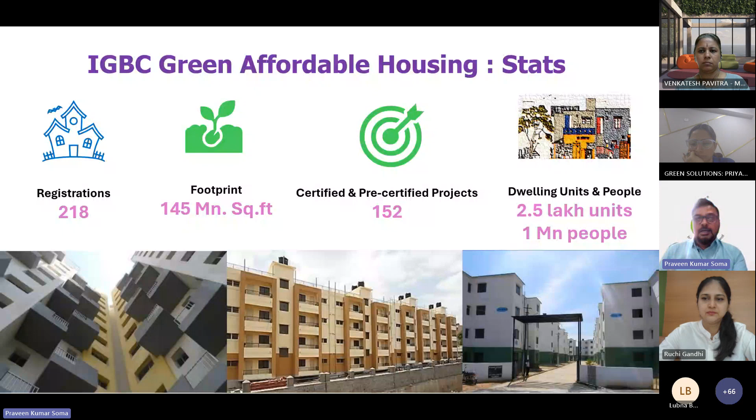If you take the overall residential segment, we have close to 2.5 lakh units going green in India. In the affordable segment alone, close to 1 million people are staying in green affordable housing today, as I'm speaking.

When you see the gap, as per the Ministry of Housing, India needs an additional 25 million affordable housing units by 2030. That means in the next 6 years we should have at least close to 24 to 25 million affordable housing units built.

That means each year we should construct an average of maybe 3 to 4 million units in India. That is the gap we still have in India to meet population requirements and the housing requirements of the poor and other areas.

When you look at affordable housing, this rating system holds good for metros with area less than 60 square meters. For non-metros, this is relaxed to 90 square meters.

Since the Government of India and Pradhan Mantri Awas Yojana have come out with separate exclusive guidelines for affordable housing, even if the area is higher, if the site plan is approved, that can still qualify under green affordable housing. That means the site should be qualified for green affordable housing construction.

So this scope also needs to be clear for participants, because many CREDAI and NAREDCO developers are still unclear about which classification they should use to certify green affordable housing ratings.

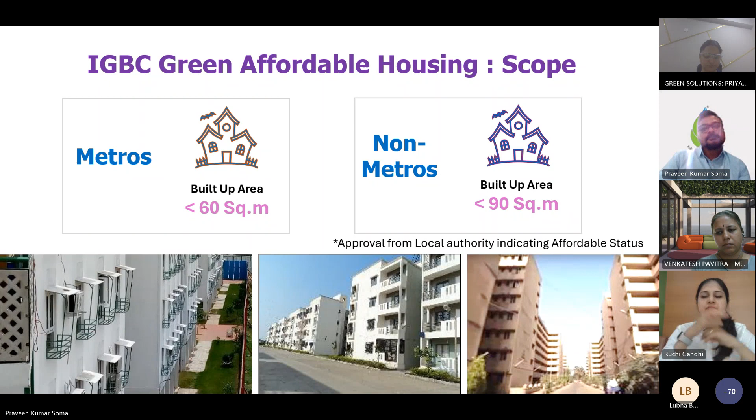If you look at the incentives, these have been in place since 2011, when the Ministry of Housing and Ministry of Environment and Forest gave relaxation for MoEF clearance for all pre-certified projects in 2011. Then all state governments extended free FAR.

For example, the Government of Punjab and Government of Rajasthan gave clear FAR incentives starting from 5% to as high as 15%. Similarly, West Bengal, Government of Haryana, Government of Jharkhand, Government of Uttar Pradesh, and Government of Andhra Pradesh have done the same—Andhra Pradesh specifically waives the premium for registrations.

Similarly, we've seen Government of Maharashtra and Government of Gujarat giving incentives, excluding Mumbai in the case of Maharashtra. Tamil Nadu gives incentives for reimbursement of fees. Government of Kerala and Government of Himachal Pradesh have also given incentives for green residential projects in India, which has raised the bar.

Today IGBC is over 12.5 billion square feet, as I'm speaking, with close to 11,500 projects going green in India, making India world number 2 in terms of green building footprint.

By 2040, India will definitely be world number 1 in terms of green buildings, because we will overtake all countries in the world and become a role model for many countries to look up to. So why are developers shifting towards green affordable housing?

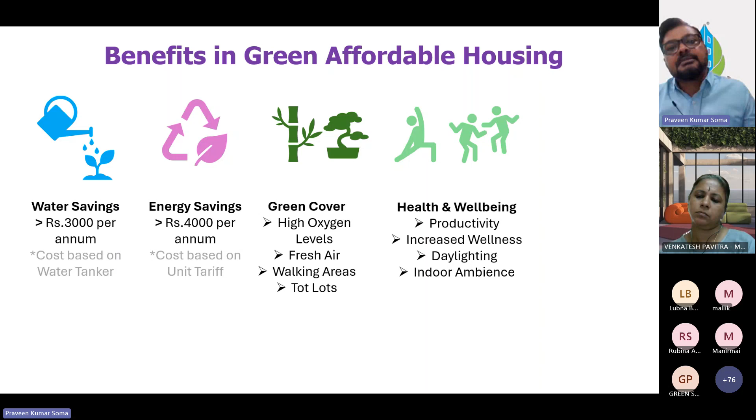When you see tangible cost, it's very clear - energy, water - but intangibly, when you have green cover, daylighting aspects covered, fresh air ventilation provided, there is a direct impact on the occupants. Why should occupants occupy affordable housing? Because earlier in affordable housing there was no gap between the towers, no daylighting, no ventilation, no standard of construction either.

But today, the wellness factor actually increases. Daylighting brings productivity increase, because in most affordable housing both male and female occupants actually work, meaning they also require good indoor ambience, and good health and well-being aspects need to be covered.

Their productivity should be enhanced, and their health should also be factored in. So they should also have hygiene living conditions. All of that is taken care of in the affordable housing segment.

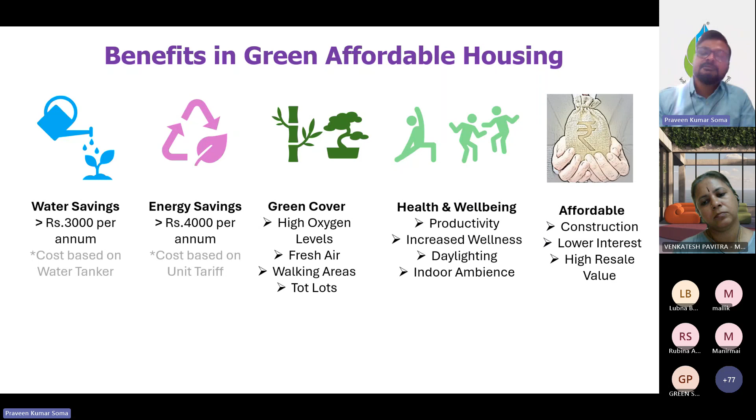Developers use different technologies in construction. Compared to a green home or a normal conventional home, the construction cost for affordable housing is lower by default. Not only this, whenever an occupant buys affordable housing, even their interest rate is lower. Thanks to the Government of India, they've given a lower interest rate for the affordable segment, and anything less than 45 lakh rupees is considered affordable housing.

When the occupant wants to sell for some other reason, there is a high resale value. For your information, some affordable housing projects have been certified recently, and they're actually at par with any of the luxury green homes. I was surprised when I saw some affordable housing in Delhi NCR which was recently certified.

The Mahindra Happinest project in Avadi, Chennai, is India's first affordable green housing project, and the class is a completely different level. You cannot actually feel it is affordable housing. That is what we always want.

Even Tata Housing at Boisar has raised the bar to the next level compared to what we thought affordable housing looked like 6-7 years back, when the classification was different. Today, affordable housing means quality materials are used, and they cannot compromise on strength or quality. Many parameters have been addressed.

So today, when you talk about green homes, it actually indicates equal to happy people, because all these aspects are covered in the green affordable housing sector.

When you look at green affordable housing, one key concept addressed is basic amenities and public transportation. Occupants often don't occupy affordable housing because the accommodation is predominantly very far, 40-50 kilometers away from their workplace. They need to reside closer to their place of work, which was a very big challenge.

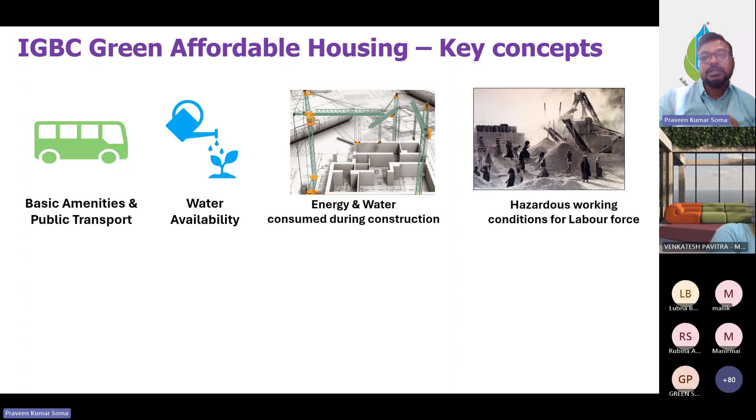As you know, workmen during construction are often exposed to a lot of hazardous working conditions. But due to best practices in the green homes sector, this has been completely eliminated. This is one of the important factors addressed in all green residential projects.

They've set new benchmarks in terms of hygiene living conditions. I can see a very clear demarcation between 7-8 years back, when I saw affordable housing constructed by government sectors, and how it's built today. It's completely changed, in terms of segregation of waste at the source, dry, wet, and organic waste, and exhaust systems in toilets and kitchens. The developer is now providing this in affordable housing, which is something completely new.

Even some green homes don't have this installed, whereas in affordable housing the developer is actually providing it. In one home in Pyramid Housing in Delhi, I've seen they have an organic waste converter and segregation in place, which is not even seen in some green homes now. Some green homes do have clear exhaust systems with a double height area. Normally we put organic waste in one corner, but affordable housing is raising the bar to the next level, looking like a luxury green home to me.

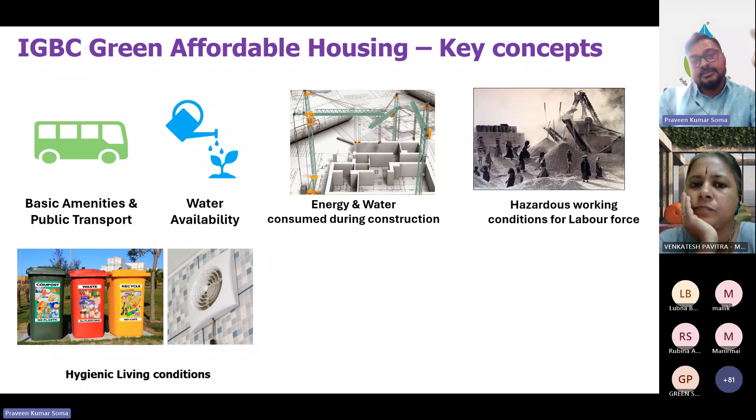The construction itself is undergoing a complete paradigm shift. It doesn't look like a normal home anymore.

It looks like a very luxury home because they use alternative technologies in terms of prefab constructions, monolithic constructions. Thereby the construction time is decreased, and the manpower for coming with the quality and finishing is taken care of.

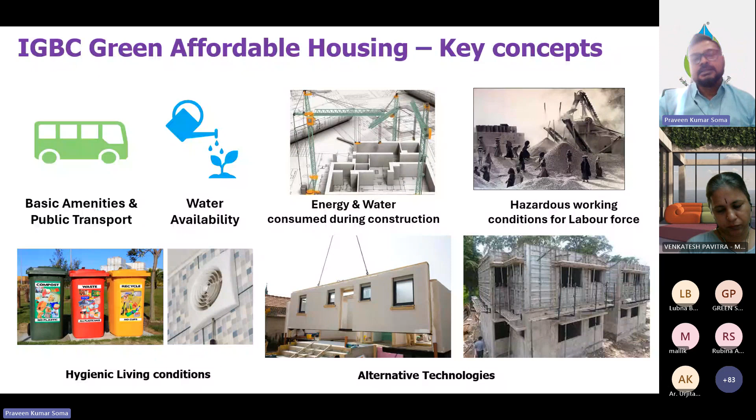Today we are also seeing container homes at a much lesser price, and this is one of the key aspects of the affordable housing rating program. Even the World Green Building Council in their recent publication talked about how it is not only about going with green affordable housing—there is a shift towards going for green procurement. That means the materials that you choose should lower the carbon.

For example, today we have Green Pro. We have low carbon steel, low carbon cement, low carbon concrete, because they constitute almost 60 to 70% of the entire embodied energy.

When you want to lower the embodied energy by default, when India talks about 2070 as net zero, whether it is a green home, affordable housing, or any other home, they should definitely shift towards net zero also. As a first step, they can look at having a green procurement instituted in their own segment.

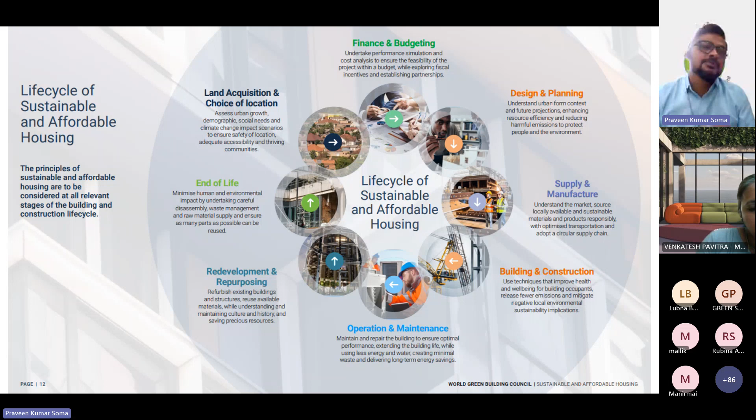That is, all developers, when they construct their homes, should see that out of, let's assume, 20 line items, how many actually fall under Green Pro certified products or have a low embodied carbon. They can select today—there is ample choice to select in cement, in RMC, in glass, in tiles, in the facade material itself, and in construction blocks which have got lower carbon.

So that is exactly in line with the World GBC target that by 2030, all new projects should aim for shifting towards net zero. By 2050, all existing stock of buildings, whether residential or commercial, should actually shift towards net zero carbon.

That's the world's biggest goal and vision shared by other countries, and that's why they've given this framework which talks about financing, design planning, supply and manufacturers, building and construction, and operation and maintenance—all of which should be as low carbon as possible. It also covers redevelopment and repurposing, meaning instead of just demolishing, how can you do a sustainable demolition?

That means when you demolish, you pick the materials which can go to recycling without depending on virgin resources. They also talk about the end of life—don't just see the material going to the landfill, but always look for how you can divert from the landfills.

If you use modular construction, 3D printing technology, or BIM technology, you can actually reduce the materials by default. The first principle is reduce—then you think about whatever construction waste is happening.

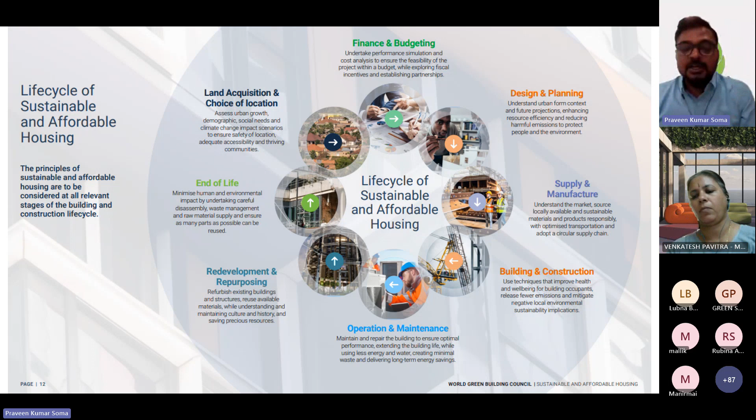You try to recycle or reuse within the same project as much as possible. Identify recyclers and send the construction waste to them so that they will not depend on virgin resources. That is very important to actually make a green planet in the future.

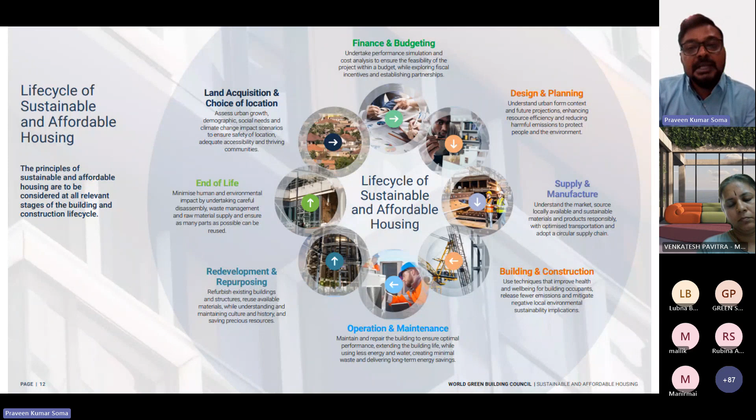Thank you, that's all from my side. Any queries or questions, I can take that.

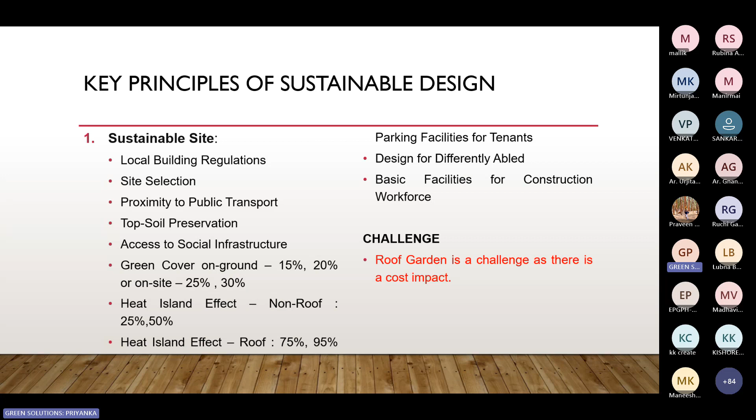This is one challenge I'd like to discuss on this topic. Being an affordable project, you have a larger building footprint compared to other housing rating systems, because as per the bylaws or policy, the building footprint is much higher. So you have a challenge to incorporate the green, you have to provide parking also, so it's tricky to provide green up to 30%. But in most cases I've handled, going for pre-certification, I've comfortably seen 20%, though there's a challenge to go for 30 or 25% green on site practically.

For heat island effect, both non-roof and roof, strategies like grass pavers, high reflective paints, and shading the footpaths are really helping to reduce local temperature and achieve a better ambience.

Then we have parking also - as per norms and the IGBC benchmark, most projects fulfill requirements by providing two-wheeler parking facilities for the tenants, which is nowadays mandatory by the government. And then design for the differently abled, which ensures the building design caters to differently abled and senior citizens for their well-being.

And further, the basic facilities for the construction workforce to enhance the quality of life and hygiene of the workers. It promotes safety and health work conditions.

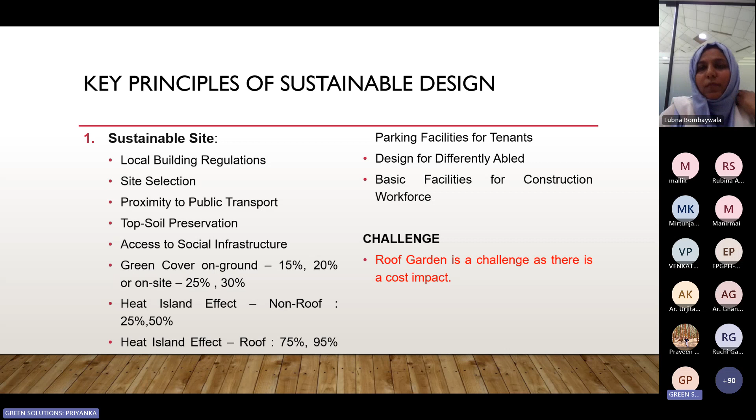And further moving towards energy efficiency, under that we have the wall, roof, and envelope. With respect to the envelope, IGBC has taken a very well thought out stand and research in terms of fixing the values and benchmark for the envelope, because in affordable housing you need a balance between cost and efficiency. So it's very well defined in the IGBC housing rating system.

For the wall, practically we are going with AAC blocks and Mivan using 20 to 30% fly ash content in order to have an energy efficient wall. Then in terms of U value, various glasses are available in the market nowadays which are not very expensive, but in the medium range we get for affordable housing, meeting the U value and VLT as per the IGBC benchmark, so there's no extra impact on cost in terms of the glass.

Then we have chajjas. We always encourage the architect, if we are enrolled during the design stage, to use chajjas and extended balconies to increase SHGC as per the benchmark and ensure 80% of windows have a projection factor over 0.5. Not only to meet green building norms, but practically also as a user I always feel that if I am staying in affordable housing, we should have balconies. We are living in a society and climate where the heat is so aggressive, we always look for chajjas. Practically if these things are incorporated during the design stage, it's really wonderful for sustainable architecture. It plays an important role in today's living world.

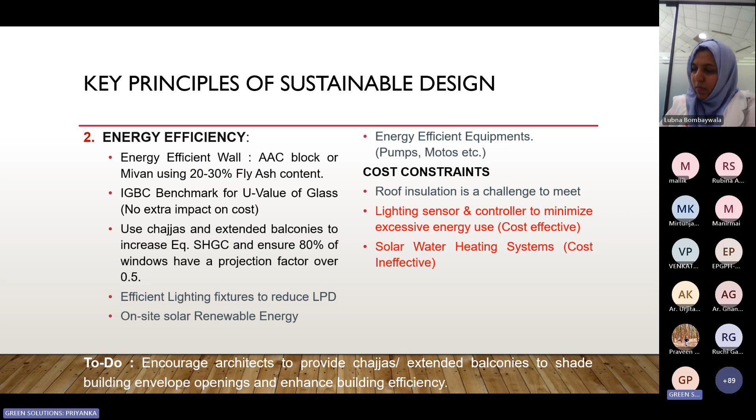Then rainwater harvesting is being done for the entire site, 100%. Then we are going with drought tolerant landscaping, and the projects are putting effort to have local trees, local fruits. We encourage this so that people can have that, whether it's a home requirement or not, we always try to convince the developer or builder to go with fruit trees, local fruit trees, to have that ambience with good foliage, plus it gives local maintenance benefits, they can save on water and everything. Then we have efficient irrigation systems in place, like central shut-off valve.

We have drip irrigation, central shut-off, PRVs and sprinklers in place to save water. Then recycling - yes, STPs nowadays are a mandatory clause by the government also, whether it's green or not, but STP should be there. And when going green, they are...

...reusing the water for landscaping and flushing. So yes, recycling and water recycling is an essential part of the project, repurposing that treated rainwater for reuse again.

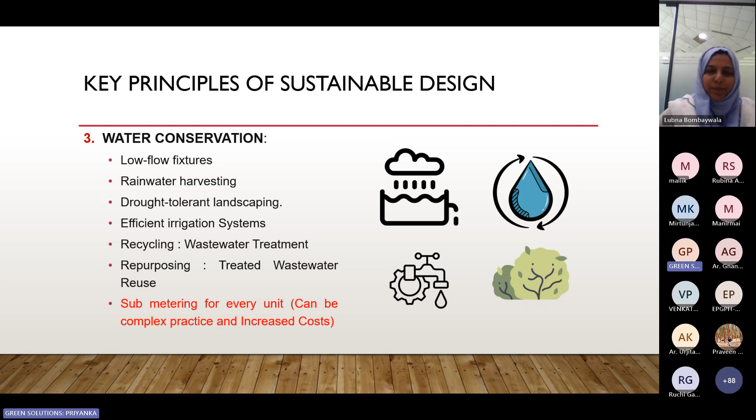Next we have material conservation, and here separation of household waste. Yes, I've even heard Praveen mention that one of our Delhi Gurgaon projects did organic waste management and separation of household waste so beautifully and very well organized.

I just want to mention one more important thing here - in affordable housing projects, it is the developer's duty to maintain the site for 5 years. It is well mentioned by the government that the developer will maintain the site for 5 years, and thereafter he can outsource to a third party for the resident welfare association. But in order to manage, he really puts in good efforts.

Now I've seen so many projects where segregation, separation and organic waste management is really beautifully designed with exhaust systems, well dedicated places. Earlier it was like a small sub-place they'd given and just dumped things there. No, nowadays it's very properly designed, taken into consideration initially only, with proper exhaust systems and foul smell control, keeping buffer space in between, creating trees in between to avoid that foul smell. This is one category wherein I think developers are really putting effort to maintain and design well.

Then again we have local materials. Yes, now we are encouraging local materials, and even the contractors are well prepared to use local materials and certified green products.

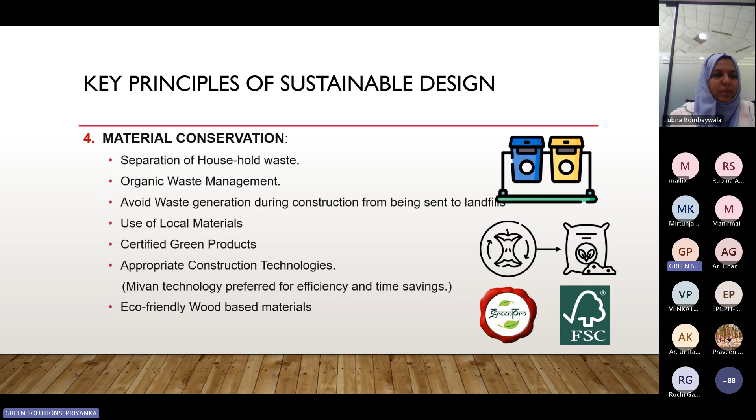Then we have appropriate technology - actually there's a benchmark by the government to deliver on time. So the MIVAN technology is really preferred for efficiency and time savings, because if you compare MIVAN to a conventional system, MIVAN is 4 times faster than a conventional system. So MIVAN technology is something I've seen in mostly 90% of affordable housing projects, using it to save time and gain efficiency. Eco-friendly wood-based material also plays an important role in material conservation.

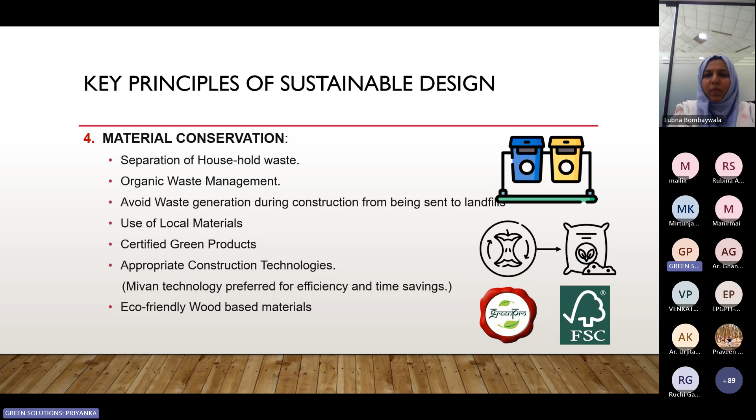So next is indoor air quality. Here we have a no smoking zone for all the campuses, and then enhanced daylighting, fresh air ventilation, cross ventilation.

It's a design challenge. Again, I want to highlight in the end why it is a design challenge. And then we have exhaust systems in place.

Then we have low VOC material, paints and adhesives, building flush out, and occupant well-being facilities. Like they have a proper Anganwadi and gym places wherein the users can have their small gatherings, yoga places, and an open gym sort of places for occupant well-being facilities, which is really adorable to see these practices in affordable housing rating.

And the next is the required openable area. This is one thing I want to portray as a design challenge, because a core of 6 to 8 units per core is usually the design benchmark for affordable housing. Due to this strategy, the units are placed very closely, and high density of dwelling leads to lack of cross ventilation. Besides, they are very closely packed, so the cross ventilation criteria which I found is difficult to achieve in affordable housing.

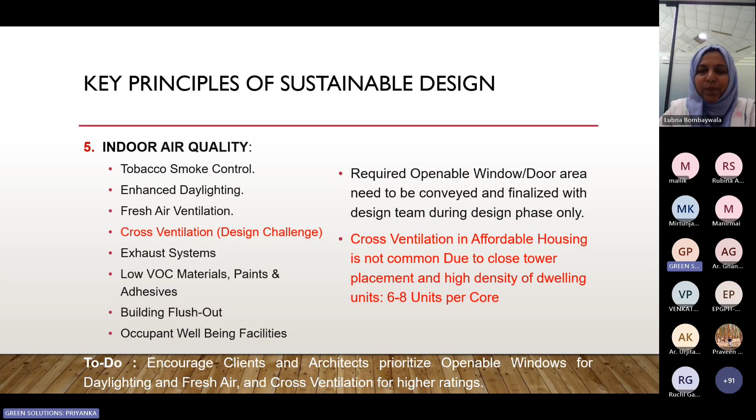Though in some of the projects we got, we were involved in a very early stage, and the site was very huge, around 15 acres. So in that area we do get the cross ventilation, but over the years I've seen in small 5 to 6 acre sites, it's very difficult for the affordable housing sector to get cross ventilation because of the design strategies well defined by the government also. Ventilation is adequate, more than 8% in all the living areas, but cross ventilation is a challenge.

Then this is the primary design steps and the limitations. As a preliminary design stage, we outline our approach and the limitations we may encounter during the design. So these are the focus areas.

Number one, the extended chajjas, the extended balconies. This is the first priority in passive architecture, which we always believe in reviewing or giving our input to the design team for affordable housing, and the tower orientation, doing the sun path analysis and shading analysis before freezing the concept.

So we are doing these types of analysis for them, getting shading for more than 80%. We are getting good ventilation, fresher ventilation, and less heat gain through better orientation in design.

Then we have a challenge in design approaches, like balancing fresh air with WWR. Being affordable projects, they don't have a big glazing area. There are certain limitations in affordable housing, but mainly the fresh ventilation, while ensuring the WWR is below 20%, because in affordable you must have seen 20 to 25% is the maximum glazing area or window area you get. So balancing between the fresh air and daylighting is a challenge, but it is always recommended to check this before the design gets frozen.

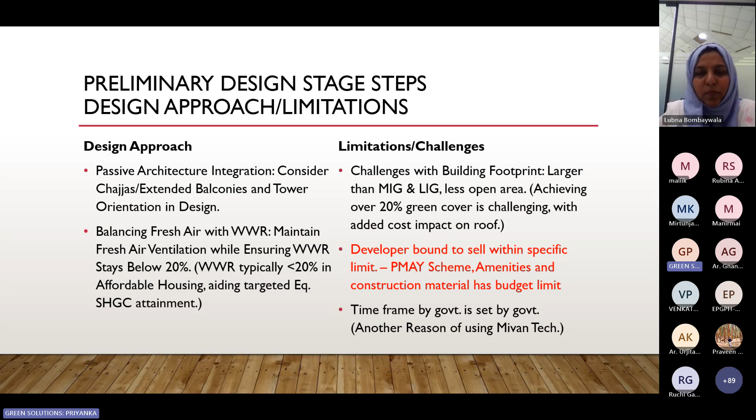So the time frame is set by the government, which is 4 years. I'll explain it - from the license to delivery, it's 4.5 years, which is well explained.

Next, maximizing the green space is a priority. Universal design incorporating these measures, adequate openings for daylighting and fresh air. Then we are including OWCs and waste area segregation in the initial design. Further, plan non-roof impervious areas with grass pavers and shading the footpath with green tree cover.

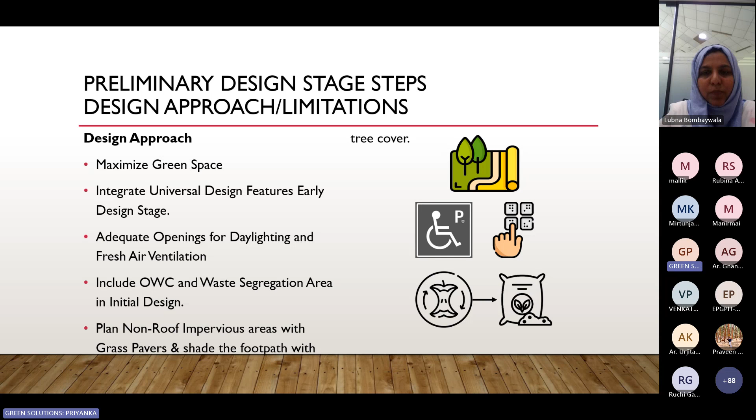Next is showcasing a project. This is a project in Gurugram, awarded the gold rating under IGBC Affordable. You can see it's a beautiful architecture, with a central courtyard here. So greenery, most of the windows face towards this side, having flora and fauna and a very pleasant view, so well ventilated.

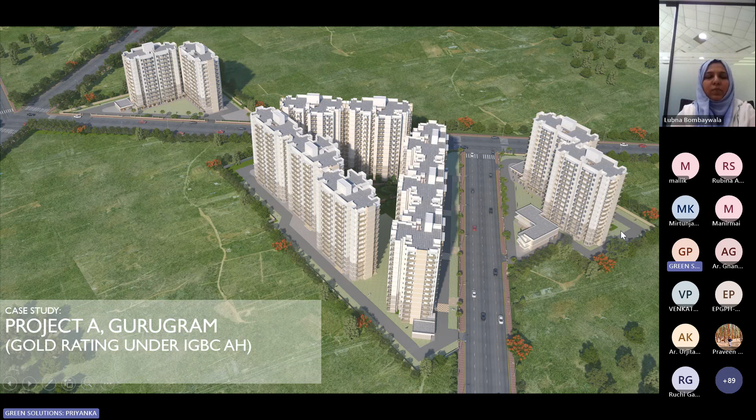This sector also has a separate green area, and the other side also has a green area. So this is the feature which was implemented. There were 12 towers with approximately 40,000 square meter area. There were 1,400 dwelling units. You can see, because of the efficiency of the dwelling units, if you compare it with green homes, it's comparatively higher.

So the parking spaces was 1,500. In order to suffice the requirement, they are bound to provide more than the dwelling units. So yes, they have provided 105 for the visitors, and 20% of the plot area was landscaped, with native shrubs, trees, and local fruit trees.

The project proposes a rainwater harvesting system to handle more than 75%. They have applied SRI paint on the roof, along with low flow fixtures. On site, an STP of 940 KLD was there to ensure 100% wastewater treatment, with treated water used for flushing, landscaping, and vehicle washing.

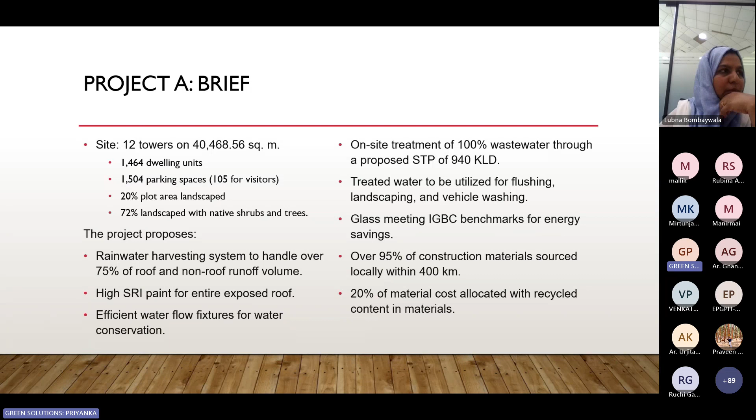The glass was meeting the IGBC benchmarks in terms of VLT and U value. In addition, they were very well ventilated, with fresh air ventilation being really adequate.

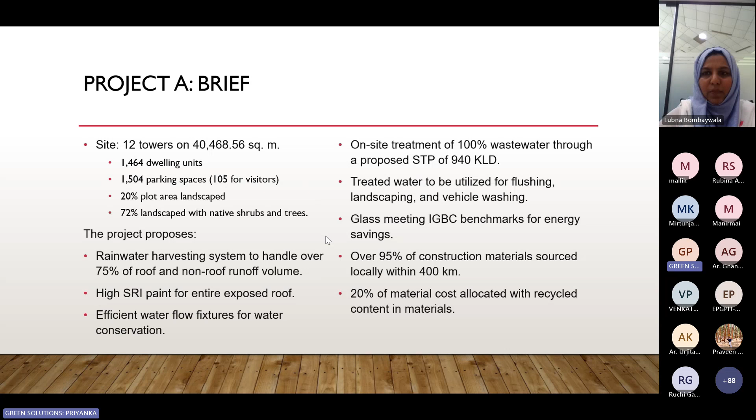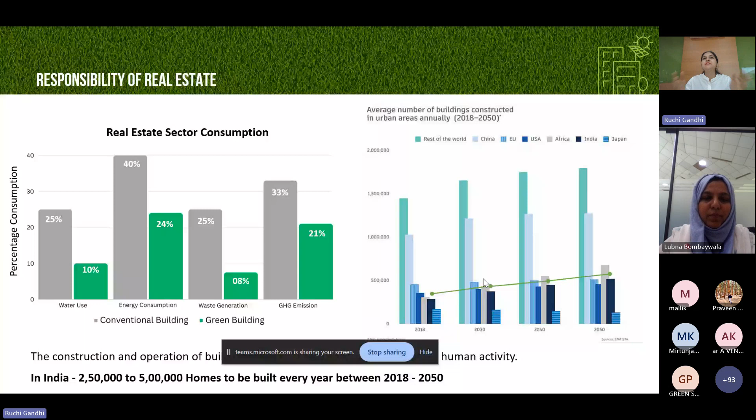India is a developing country, not a developed country, so we all know that 50% of construction is yet to happen. You can see this slide, also developed by GBPN Global Network. Over 50% rapid urbanization is happening, and over 50% of India's population is projected to be urban by 2050. The survey done by World Urbanization Prospect says there will be 400 million urban dwellers by 2050.

Out of that, 96 to 99% will be in the affordable segment. If we look at the numbers in terms of income, this is a survey done by Statista, which shows the share of households by gross annual income across India in financial year 2021 was 52%. So 52% of income falls under affordable housing, and they will need housing to be built and a place to stay.

So making it green will have a huge impact on the global resources available today. Now, post-COVID, we all realize that green doesn't impact only energy and water, but also has an impact on social equity, economics, and of course, very well proven in terms of the environment. So how do we define green affordable housing?

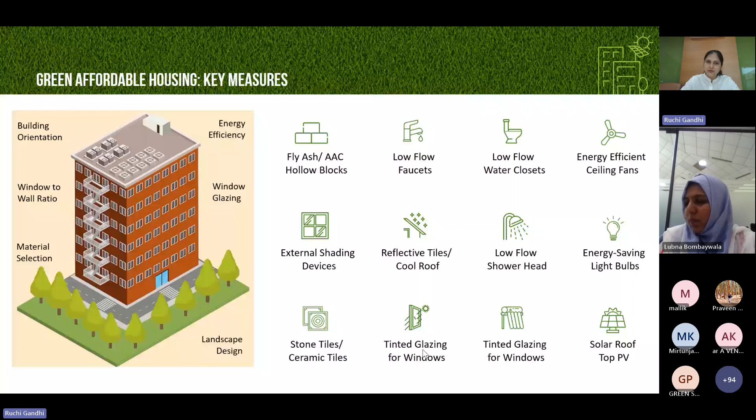This is also a survey done by IFC Awas Market, where they say the earlier measures I explained in the previous slide, like fly ash brick, low flow faucet, single flush for water closets, energy efficient ceiling fans, external shading devices, low flow shower heads, tinted glazing, solar water heaters, and solar rooftop, along with the overall monthly savings in utility bills, vary by region but generally fall between 30 to 40% if you implement these simple measures into the design.

So let us talk about our own experience. As Savvy Green, as a consultant and as a developer, we have been working on a few of our own projects and a few client projects. Savvy Strata is our own project, and I'll explain that case study in the next slide.

What we have seen commonly is that land price for the developer is also a challenge when making affordable housing. In all these 5 schemes, all the areas are in Gujarat - Makarba, Sanand, Ognaj, Bopal. All these areas are developing areas, not developed areas - a little outskirt of Ahmedabad, where you can buy land at a lower price, but you still get all the amenities since it's an affordable housing segment.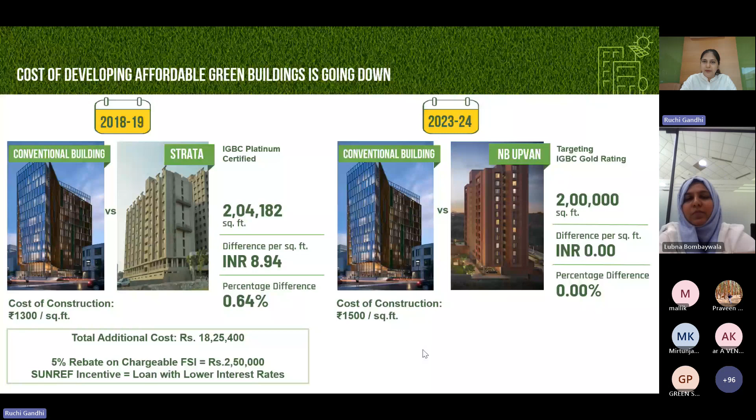So Savvy Strata is our project, as I mentioned earlier. It is 1 and 2 BHK studio living, with around 300 apartments, located in a developing area of Ahmedabad, and the built-up area is around 2 lakh square feet.

One unique thing in this project is, as you can see, we have one basement parking, one ground level parking, and also one podium parking. So each and every dwelling unit has a car parking space as well as a two-wheeler parking space. As you can see in this picture, on the podium level we have parking as well.

We have a small gymnasium, open from 4 sides to have maximum fresh air and daylight. We have a small open gymnasium, a yoga room, a carom and chess board, and a small community hall as well. And you can see on the north side that at all floors, the passage areas have a good amount of vertical opening.

So the passage area throughout for 1 BHK and 2 BHK is connected, and they have cross ventilation in the entire passage area. Also at the 4th and 8th floor, we have tried to come up with a viewing gallery as per the permission we received for the construction. So we have tried to implement as many features in the design as we can.

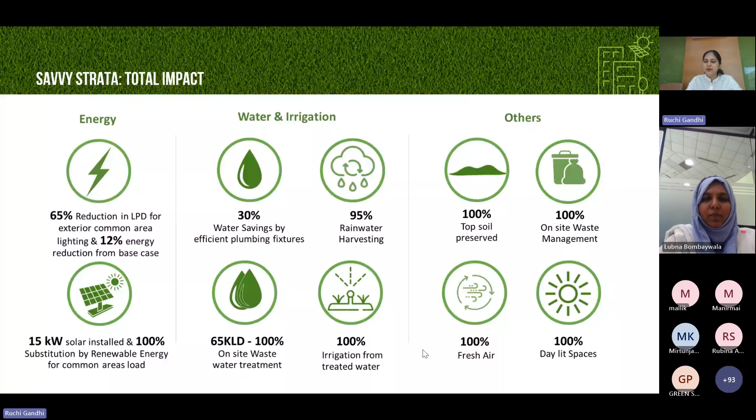Topsoil is also preserved, and waste management is a major criteria we follow. 100% of fresh air we get due to ventilation and the plant windows. And for daylight, we claim not 100% but at least 80 to 90% of the spaces we try to create with daylight.

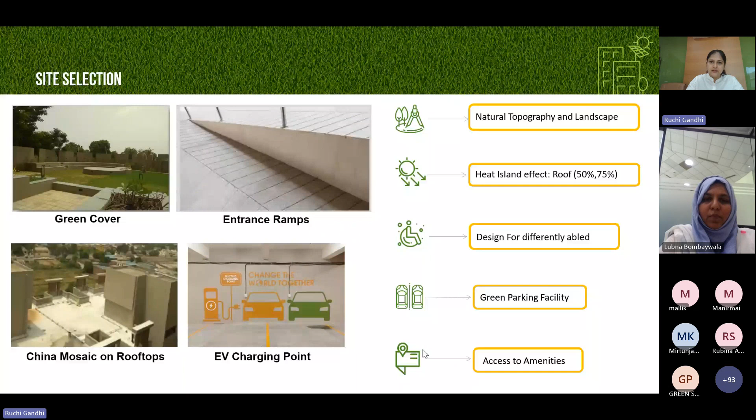I'll quickly explain the criteria: we have taken 15% green cover and an EV charging facility. We are trying to educate our customers by putting signages for the entrance ramp, and that facility is already there. And we have put China mosaic on the rooftop to reduce the heat gain.

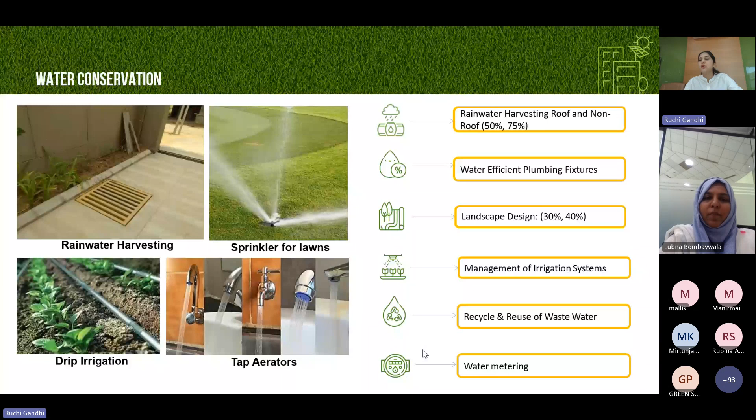For water, we have rainwater harvesting, tap aerators, and low flow fixtures as well. We have installed an STP, and common area sub-metering is also installed.

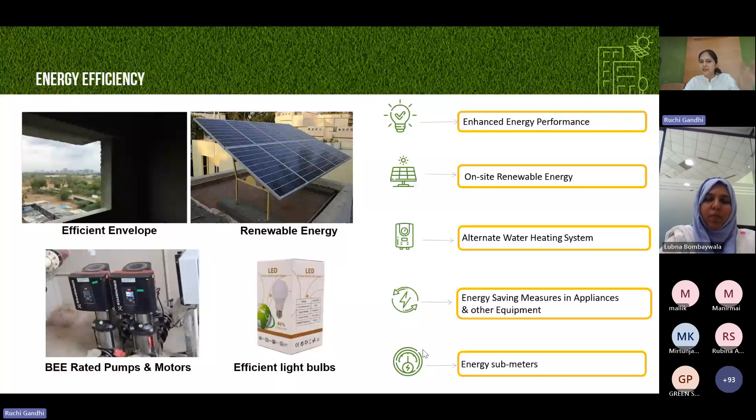For energy, of course, efficient envelope plays a major role. We have star rated pumps and motors, efficient lighting, and solar is also installed. So all these pictures are actual pictures of an affordable housing scheme which we are working on.

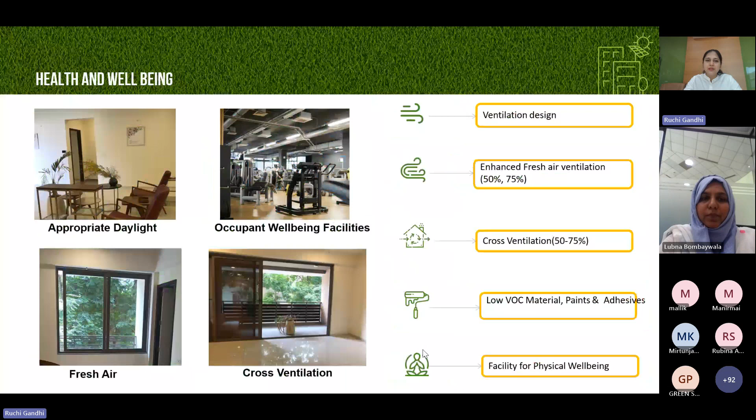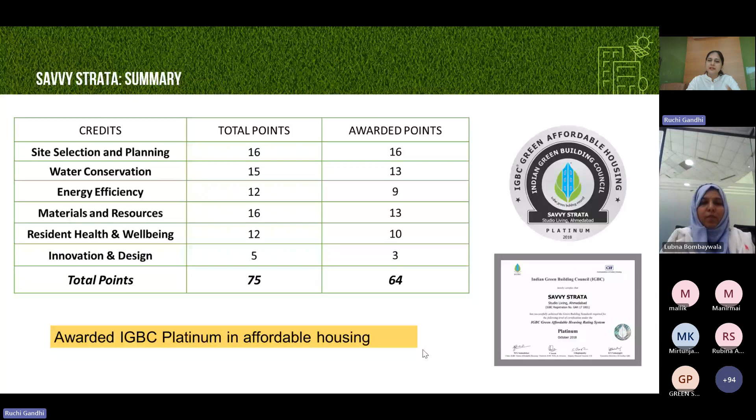And this is a summary: we have got a platinum certification with 64 points. Similarly, there is another building like NB, and they have also done all similar features into their design as well.

There are a lot of funding schemes which I think Praveen has mentioned very well: SBI Bank, HDFC Bank, SUNREF, Punjab National Bank, and IFC. One interesting thing is that a lot of green funding is coming from abroad just for affordable housing. So there is a lot of scope in affordable housing, and people see a lot of scope, but every funding is related to the green affordable funding.

So there are very minor steps which we have to follow. And if you just follow the IGBC guideline, those steps will become very easy to follow, and then you'll be able to do a green, affordable, and healthy housing as well. Thank you.

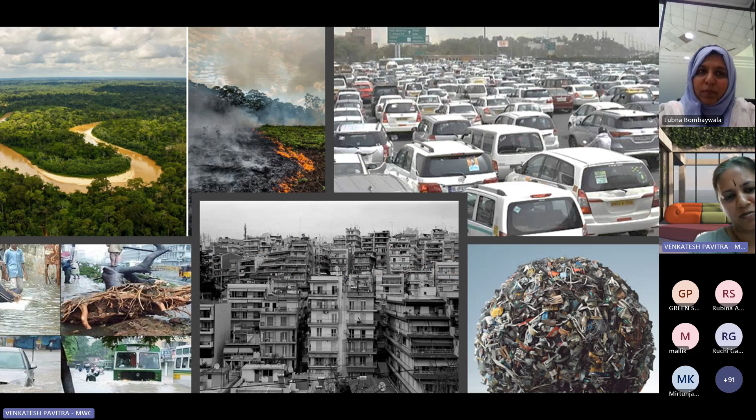So just a thought as to why as designers we need to create a sustainable design. I can definitely say that a picture speaks 1,000 words. Nothing to say here, but the impact of real estate that we have is on all parameters, whether you take the air, the water, the energy, the amount of waste that is getting generated, and the big one, which is climate change. I think all of us are impacted, whether we are designers or not. I think each of us, in our own homes itself, the impact that's happening is huge.

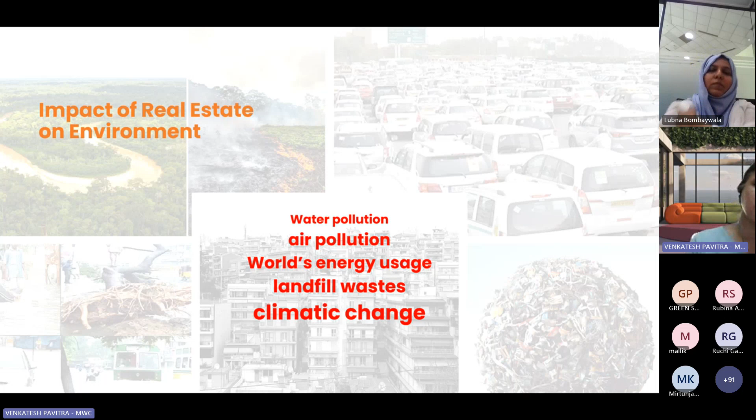And how designers like us can play that important role. So I just want to cover a few quick myths that we have on sustainability, typically that we start off with. So just some few lines that I've put is, sometimes we say sustainability is too difficult to understand, but actually it is very simple. And when you go back to our school, etc., the first thing that our teacher or our parents or our grandmother says, don't take more than what is your share. That is a simple philosophy - if we follow it in everything that we do, it cuts down on many things in terms of what we need to actually provide.

Typically when we say sustainability, we think it is only about the planet, growing trees, or environment, but actually, I think even Ruchi covered in a slide, it encompasses people, profit and planet, all of them together. When we say RRR, typically the thing that comes to mind is, can we reduce, reuse, and recycle? But some of the things which are also important are, are we recovering what we're using? And more importantly, are we repairing? Many times we use and we throw. Can we actually repair and reuse it again? That is something I think we should follow.

Sustainability, of course, the mindset was there - if you go back a decade, people said the cost of capital, cost of construction to create a sustainable house is expensive. But now I think it is more important to understand why we are doing this. It is not for us - it is for saving now and for the future. And definitely, all of us, each of us in this webinar and the participants, each of us can make a difference. And that's where we are here to voice that simple thing - that sustainability is for all.

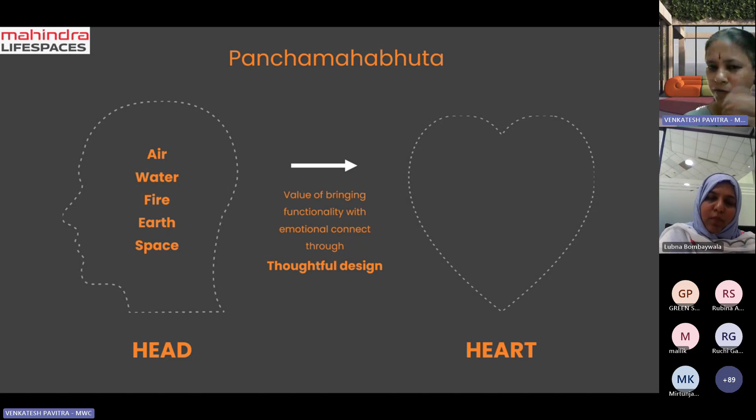The important thing is to collaborate between the head and the heart and create value for the customer through thoughtful designs. In a quick summary, with air, the most important is: are you creating the right sizing of windows, and allowing natural ventilation, at the same time cross ventilation wherever possible in the design?

If you look at water, whether you're using gray water for flushing and landscaping requirements, using it for irrigation purposes, reducing consumption by using efficient fixtures - these are some of the ideations we can do.

In terms of fire, which represents Agni - energy - basically how we can conserve energy: first is to reduce through climate responsive design, then get into the purpose of how we can meet the demand through solar panels and other ideations in the conservation for energy.

On earth is the material selection. In affordable housing, the most important is the material selection, right? From your wall assembly to roof, doors, windows - it's very critical that what we choose meets the criteria of the affordable and green housing parameters.

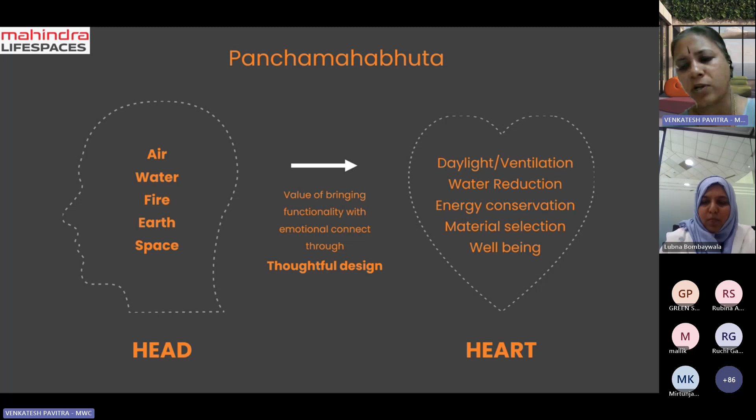Last but not least, when we speak of space - while most of us as designers focus a lot on the FSI, on the building, on the saleable area, on the RERA carpet area, etc, it's also important to design the outer space. How much importance are we giving beyond the building footprint and amenities? What open spaces are we giving? How much can we give as green area, which is more effective and more functional?

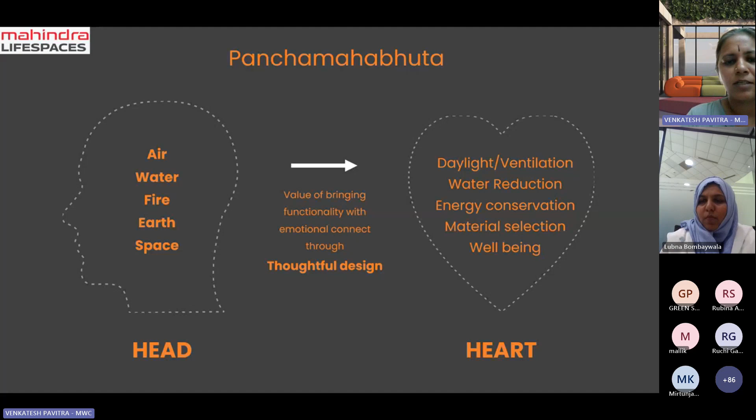So the idea is to collaborate the heart and head together to create thoughtful, sustainable designs. Let's get into a couple of examples that I want to reiterate how we have done this.

So Happiness Avadi is in Chennai. A quick fact file about the project: it's about 13 acres where we have done 12 towers, all stilt+4 G+3, totaling about 1,260 dwelling units. While the FSI is about 1.5, we consciously ensured not to go full FSI and actually gave more importance to open spaces and amenity spaces. It was launched in 2014, and this is the first project which got platinum certified by IGBC.

One important point I want to mention here is the architect Ashok B Lall. He was the driving force of creating sustainable design for our projects, and under his guidance we have also learned and seen how we can implement these ideas.

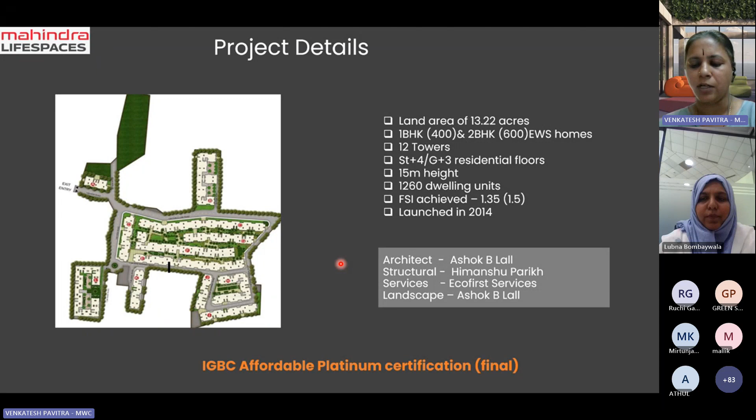I'll quickly go from the macro to the micro level. What are the design features we've adopted? In terms of site plan, if you look broadly, most of the buildings are linear buildings facing the north-south direction. Having the longer axis of the building facing north and south is most preferred in terms of orientation, which helps in reducing heat gain during summer and heat loss during winter. If you look at the layout, it's a simple rectangular design that helps with the MIVAN formwork.

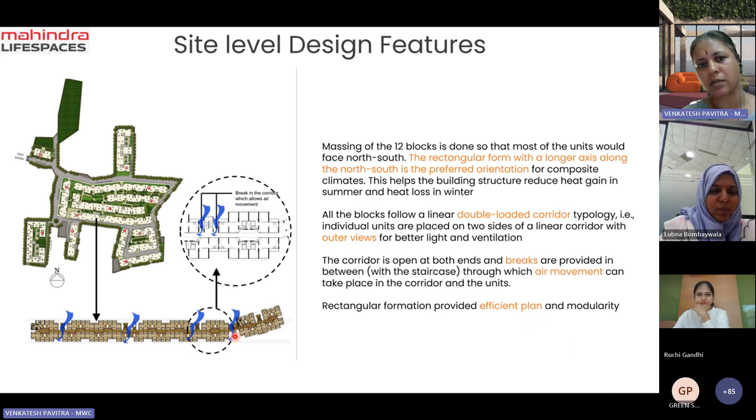To have so many repetitions, the more modular the design is, the better. We have doubly loaded corridors, and the corridors are broken by staircase areas to allow ventilation to come in. These blocks also help us optimize the shafts, etc. It's a very linear design that helps in breaking the clutter. Having multiple buildings with lesser open spaces, combining buildings together gives better efficiency in the open spaces.

These blocks are lightweight, which helps reduce the loading of the structural assembly itself. It also helps in faster production, serving the purpose of the sustainable U value that we wanted.

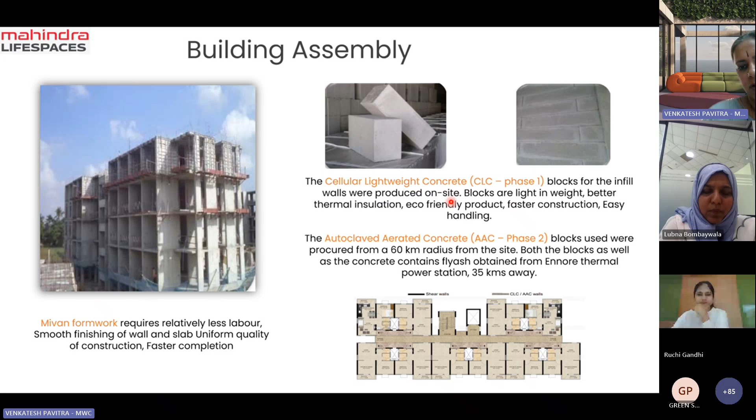Similarly, in phase 2, we used AAC blocks. We were getting these blocks within a radius of 60 kilometers, which helped in using local material. In fact, we got the fly ash used inside from Ennore Thermal Power Station.

On the layout and unit level, as Ruchi and Priyanka were mentioning, cross ventilation is difficult to achieve. What we have done is put ventilators above the doors, allowing cross ventilation into all the rooms, primarily focused on the living and dining areas, but we've tried to give that in the bedrooms also, and even the main door.

In the window section, we've given openable doors, giving you 100% opening, and at the same time a fixed glass below. A decade back it was more of a window AC kind of design, so this was utilized for window AC accommodation if required by the customer.

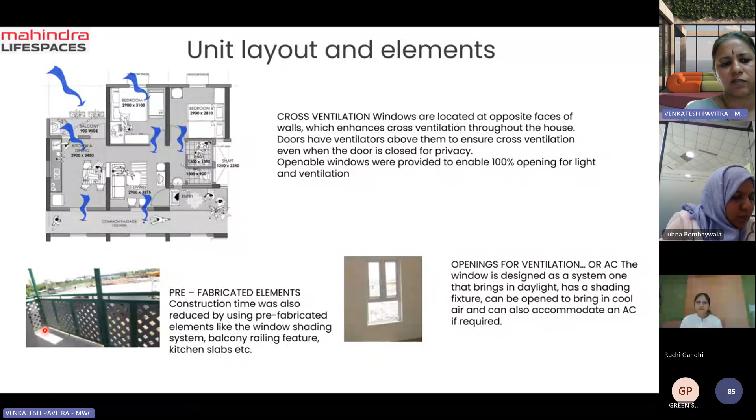In terms of the elements used in the facade, we tried to make it prefabricated so we don't spend too much time on site, which betters the quality in terms of material usage, production, and the quality of the product. For the balcony railing feature, we've used precast elements.

If you look at the building facade, the U value and SHGC become important. While we've given openable windows, we've also ensured there's enough shading device provided, using a simple method of an MS framework with a bison board to cover that.

The window to wall ratio is not more than 15%, and if you look at all the windows provided, everything is completely shaded. The extra space given here, if you don't put the outdoor unit, you can definitely put your blinds.

You can use that as a garden space like we've shown here. Even the shafts are all covered, while at the same time given enough ventilation so there's no foul smell, allowing natural ventilation in the shaft spaces.

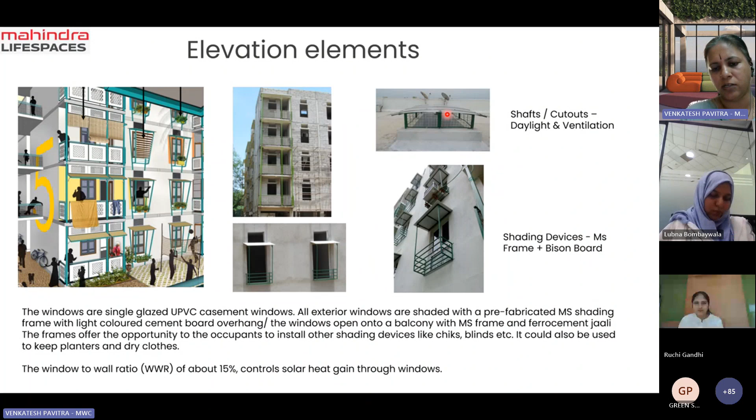In the infra part of services, while Ruchi explained a detailed format of in-house organic waste composting, we've done it in a more regular manner. One main point I want to mention is explaining to customers how to use it. It's important to segregate and reuse these systems, and that behavioral change is where we had to create a lot of awareness among our customers.

Apart from that, in the other infra part, we are providing water meters. While it's not done at the unit level, it is done at the tower level, exclusively separate for grey water, domestic, and irrigation purposes.

There was a well existing in the premises that we've actually preserved and taken care to keep as is. Apart from that, we've created rainwater harvesting pits to ensure these can be used for irrigation and other purposes.

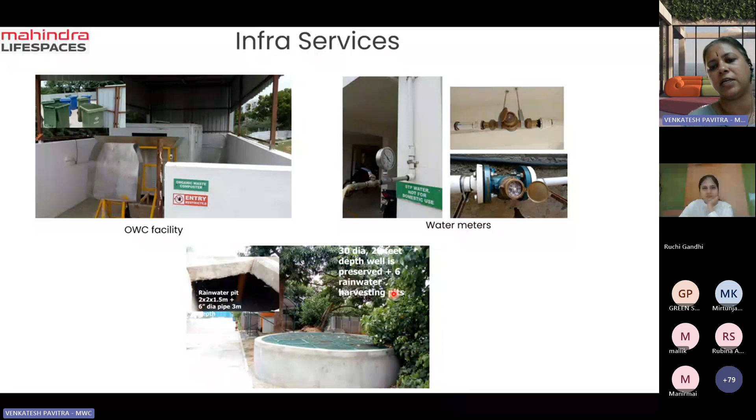So this is where we are, and based on all of this, this is how we made our first platinum project in Happinest Avadi. These are existing photos showing people and usage of our development.

The second project I want to mention is Happinest at Mahindra World City. Mahindra World City is an integrated township, and I'm happy and proud to inform you all that we've actually moved from stage 1 gold certification to stage 2 platinum certification.

When the entire ecosystem of the city is green, by default it becomes easier for us to do other projects in-house. In fact, the Happinest project is our 6th residential development inside Mahindra World City. So this is again a platinum pre-certified building.

A quick fact file of the project: it's under a land area of 4.21 acres, a fairly squarish development with 1 and 1.5 BHK units. We just have 2 towers, stilt plus 12 floors, and we've given a small podium to take care of the car park requirement, while ensuring the top of the podium is used for amenities, green areas, and the clubhouse.

The architects and other consultants are Edifice and Vastech. Primarily we ensure that the consultants we engage also have the green philosophy, so that the alignment right from concept to deliverable is maintained.

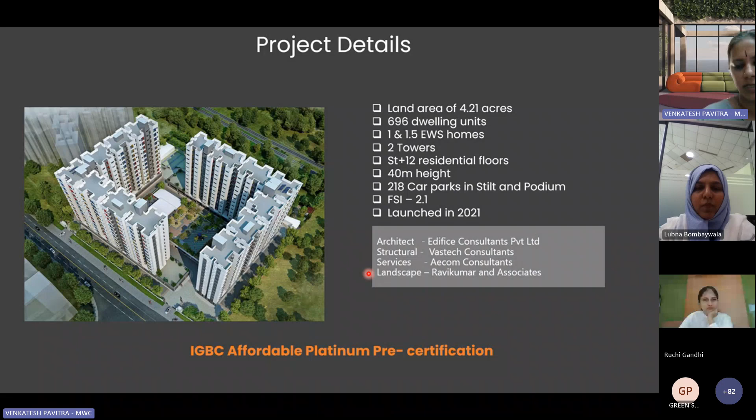Moving from the macro level of the design, this was a very squarish project, so doing multiple buildings with smaller pockets was not a feasible option. So what we've done is combined the development into two L-shaped buildings, giving a humongous amount of open space.

Usually in affordable projects, the distance between buildings is maybe only 7 to 10 meters. Here you see open spaces with a podium view or an outer view, but not a view into your neighbor's unit. The central podium is the lung space of our development, where the activities and the buzz happen, with exclusive amenity spaces.

It is completely free of all vehicles. The entire podium of 20,000 square feet makes it very favorable for an activity zone. Parking is tucked below the stilt floor of the towers as well as the podium, so from the first floor of the development, what you see is completely green, with only the driveways visible.

In terms of segregation, small things like having two entrances help reduce congestion across the development. Typically for driveways bitumen is recommended, but we went ahead with SRI-based pavers, which help in heat mitigation.

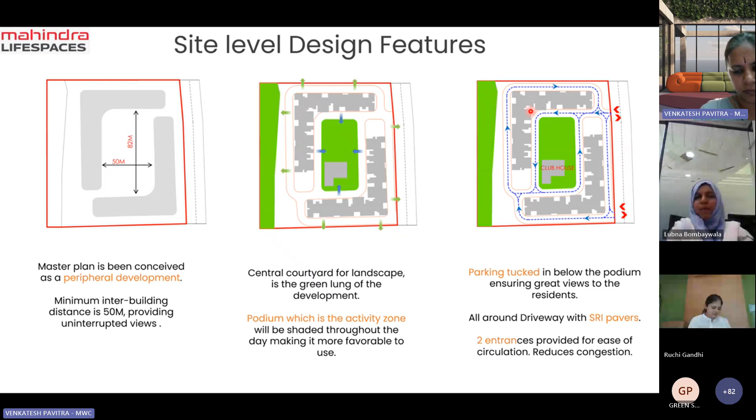On the layout level, as I said, it's an L-shaped building. We've created internal cutouts in between to allow light and ventilation to pass through. Each wing has a separate core - for example, this part of the wing has two lift staircases, and this part has a separate lift and staircase.

At the center, we've provided a stretcher lift, which also takes care of material movement. So it's a doubly loaded corridor, and the building blocks with breakout spaces in between help the free movement of air.

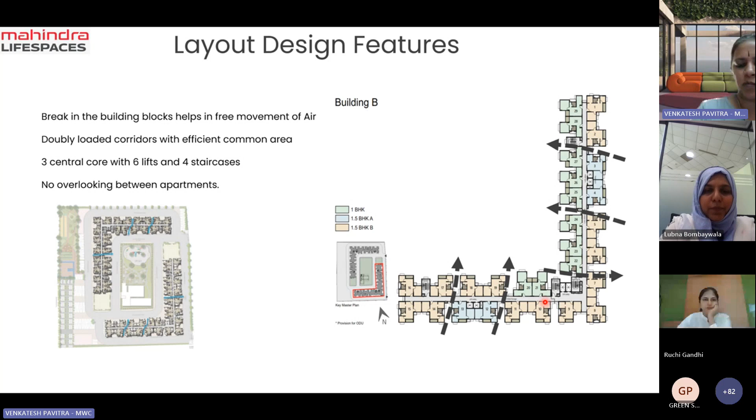On the unit level, many affordable projects do not have a balcony, but especially since this project was launched post-COVID, one of the most important feedback we got from customers was about having a balcony. A balcony is a semi-open space - going out was difficult during COVID, but we created one. Even in the smallest unit, a 1 BHK, we have a small balcony.

Even for the 1.5 BHK, we have created these balconies. These balconies and the windows we provide are like French windows. The amount of expanse we get makes the unit look bigger, while also bringing in a lot of light and ventilation.

We've ensured in planning to have literally zero passage. The entire plan is maximally efficient, giving less common area and more efficient spaces. For cross ventilation, because of the balcony and opening, no door is provided to the kitchen, so almost 50% of the living spaces are cross ventilated.

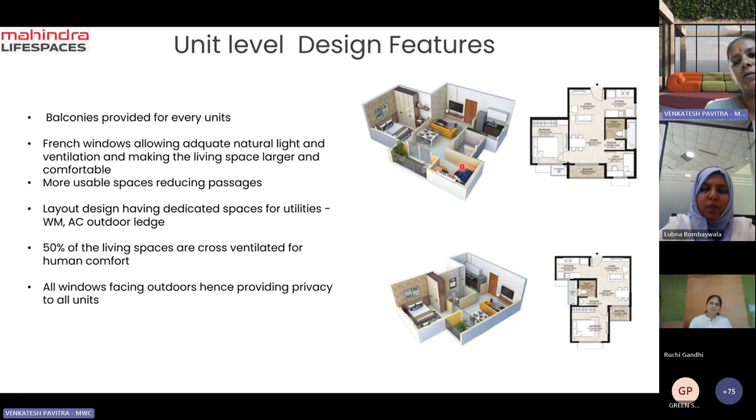The plans have been done so that you view the outside - there is nothing where you look into the house of the next unit's user. These are some of the views we've done, these are the podium views.

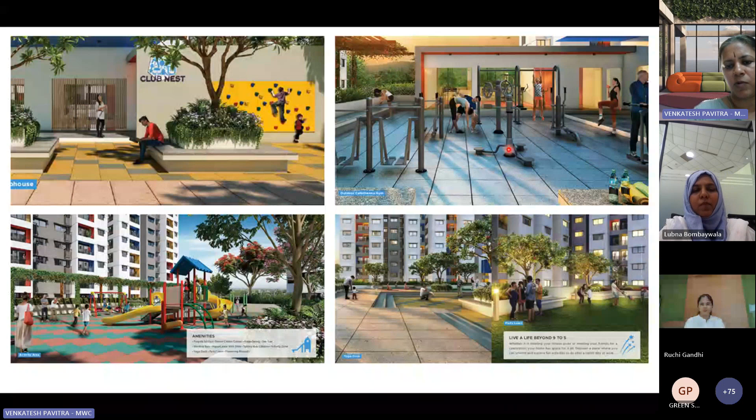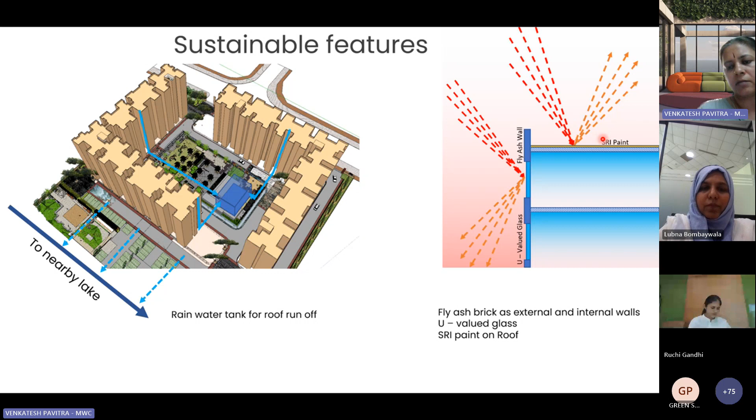Quickly on the sustainable parameters: we've provided a rainwater tank which collects all the roof runoff and reuses it for irrigation. For the walling assembly, we've used a fly ash brick assembly, glass with a U value of about 2.5 Kelvin, and SRI paint on the roof, which helps reduce the amount of heat migrating into the top floors especially.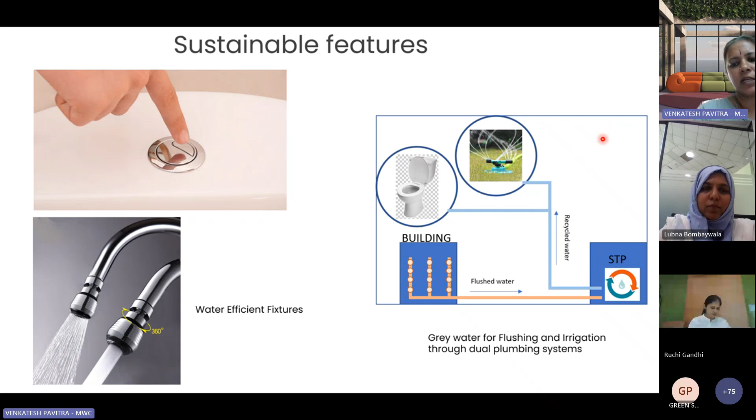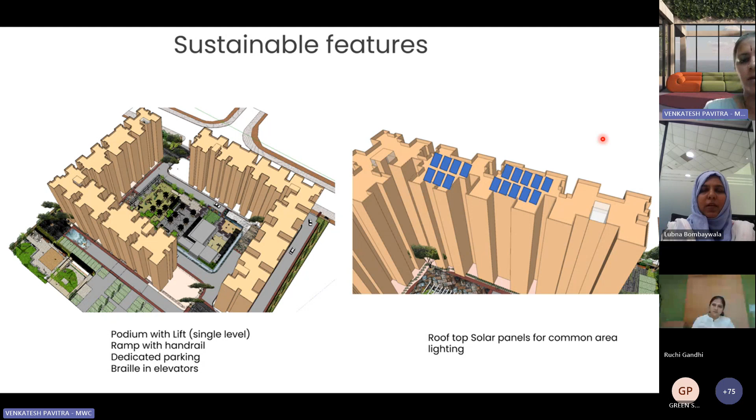In terms of water, we have provided efficient fixtures and completely use non-potable water for flushing and irrigation services by providing a dual plumbing system. We've also ensured that the podium is usable with necessary ramps, and lifts have been provided to ensure it is a universal design. We've also provided rooftop solar panels for common area lighting, which helps overall energy efficiency for the building.

This is all important because of the customer benefit. What's good for us is good for the planet, and that's why it's important to cover all of this, from the parameter of design, material, the design for the amenities, ensuring it is not only for us but for all citizens, senior citizens too, and definitely helping physical and mental well-being.

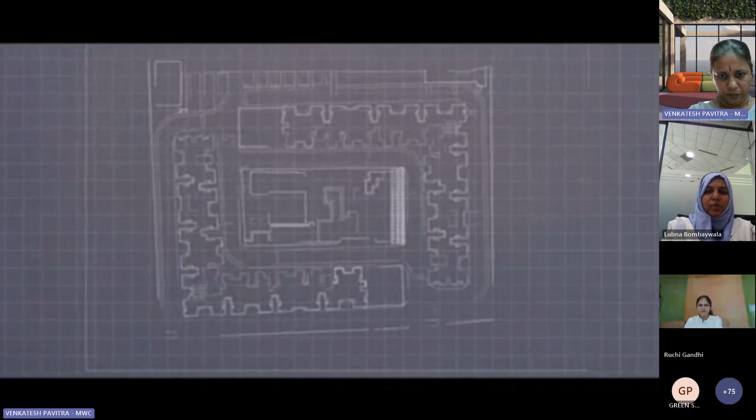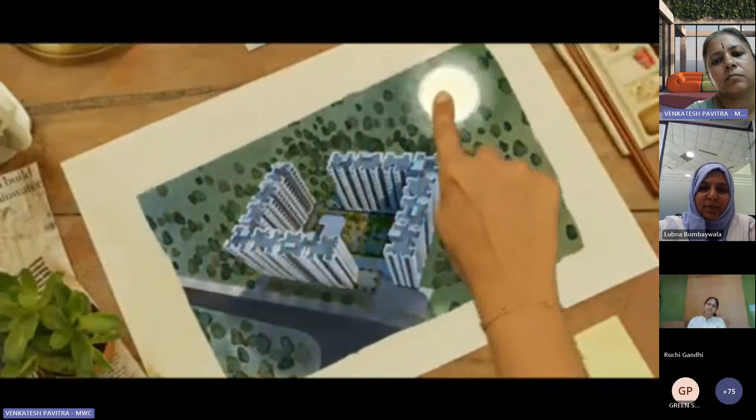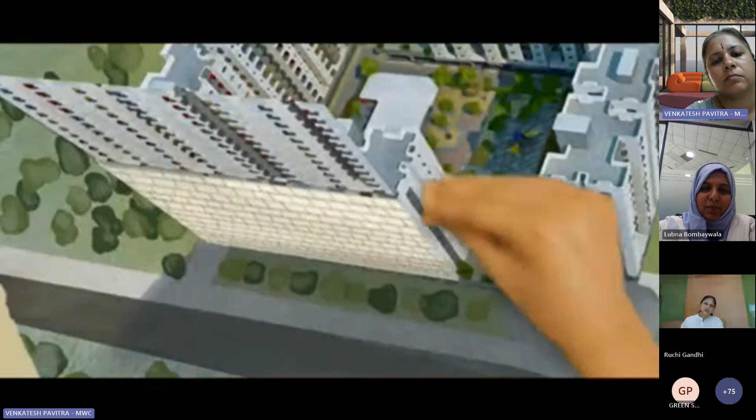Sustainable living - what does it really mean? It is about social progress, positive influences on the environment, and economic development, so that you and your family can live, smile, and prosper. To truly experience sustainable living, let's step into a pre-certified Platinum Green residential project. Welcome to Mahindra Happinest, an ecosystem designed to deliver a well-balanced life. Here, every natural resource is put to good use to help reduce, reuse, and recycle. For instance, 100% of treated water is reused to beautify your world while ensuring huge savings for you. An efficient renewable energy system ensures your world remains powered while being easy on your pocket. Sustainable living extends to the way your home is designed, with smart materials to help bring down the temperature inside your home. While keeping you cool, these features help reduce power consumption and save on electricity bills. The smart materials power your health too, helping you breathe easier and live happier.

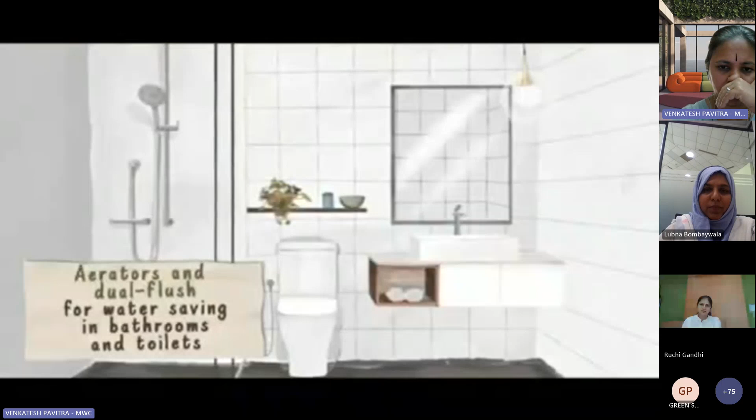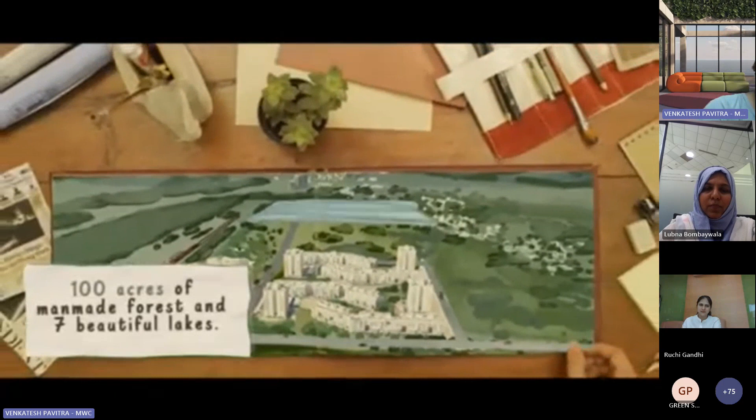But that's not all. The fixtures in your home have been designed to save and reuse water. With 50% of living spaces being cross-ventilated, you'll enjoy living in complete comfort. Besides offering stunning views, the balconies allow more sunlight and clean air into your home. This thoughtful design extends to the outdoors as well, providing a safe and carefree environment for kids. For sustainable living to truly become part of our lives, it needs to exist across the entire ecosystem - one that Mahindra Happinest calls home. Mahindra World City. Are you ready to welcome sustainable living into your life?

Yeah, I think that's it. Thank you so much. That was a really beautiful video that explains a lot. We can take some questions.